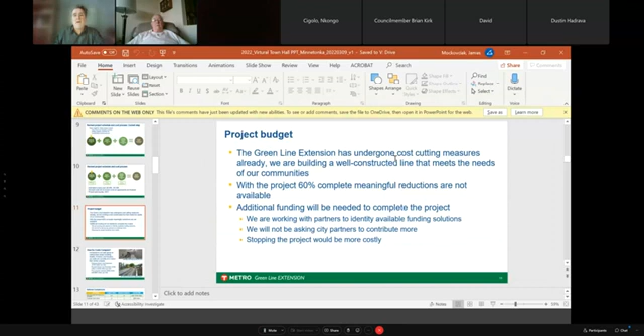Welcome to the Metro Green Line Extension Virtual Town Hall for the city of Minnetonka. This is the first of 5 town hall meetings we're doing—one in every city. That'll include Eden Prairie tomorrow night, then Hopkins, St. Louis Park, and Minneapolis coming up this month.

Some of you may be familiar with this. All right, today's topics: a basic project overview.

As I said, we'll do a project update, a recap of 2021, construction highlights. We've got some photographs of the work we've completed, and a brief description of some of the work we'll be doing in 2022.

We're also going to include a short presentation on the systems overview. The systems contract follows the civil project. We've got about 4 contracts on this project: the rail cars, of which we have about 27 or 28, the civil contract with all the walls, bridges, and everything being built today including stations, and that's followed by the electrification of the light rail system—what we generically call the systems contract. That's going to follow in Eden Prairie and start a little bit in Minnetonka this year, continuing as civil work is completed along the alignment.

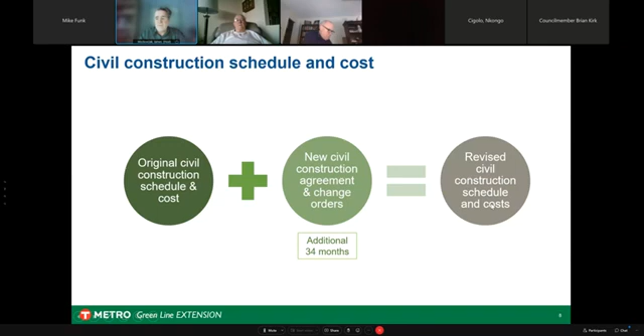And as you know, it's like a domino effect. Once you change one portion of the contract, contracts that follow also are impacted, as those contractors are waiting to do their work, and there are associated costs with overtime and increases in the cost of their lead items. So all of these are consequences of shifts and change, which then lead to the revised civil construction schedule and revised costs that we announced a little bit later last year.

So the revised project schedule and cost process, the current step, taken together, these issues impact, as I mentioned, the other green line extension items like the systems, and it follows that the testing systems, and the ticket booths and the coordination of the stations. Those contracts that follow are all affected - staffing, supplies, overall project schedule.

So now that we have a revised civil schedule and cost, we have to add that to the revised system schedule and cost, and then revise the supporting contracts, testing schedule, and then we get again the revised project opening day and cost that we announced.

So again, the revised civil construction schedule and cost adds an additional 34 months. The revised system schedule and cost, we're in the process of negotiating that with the systems contractor, another joint venture, Aldridge Parsons. And then we have the revised final contract, the revised supporting contracts and testing, and those all still have to be negotiated. Once those are all negotiated, we will have the revised project opening day and cost.

So we've added at this point an estimated project cost of 2.65 billion to 2.75 billion, and of course the final revised costs will be known when all the agreements are finalized. We're projecting the opening day now for 2027.

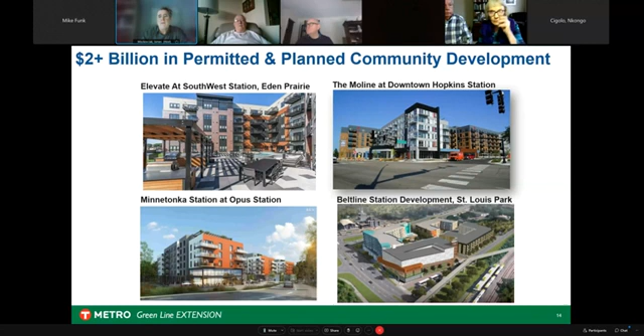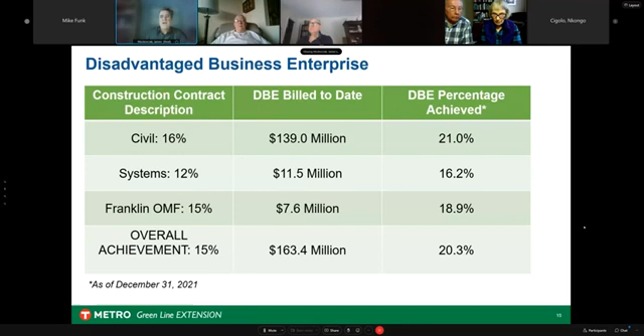We try very hard to meet about a 15% ratio of hiring disadvantaged businesses, what we call DBEs, and you can see in the civil and systems work, the Franklin OMF was the operations and maintenance facility. If you remember, back in 2015, we actually had an operational maintenance facility along this corridor, but as a result of cost-cutting measures, we removed it and expanded the existing OMF on Franklin Avenue associated with the Blue Line. Through all of that work, we've been able to maintain a relatively high percentage, and we're continuing to try very hard to meet our goals. You can see the amount of money that's going out to DBEs as well.

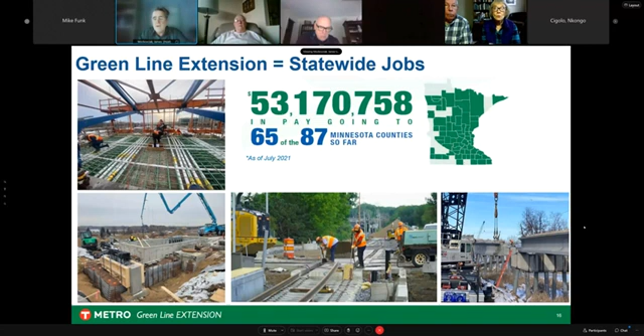And then, of course, it goes beyond just DBEs. You can see that you've got over $53 million in pay going to 65 of the 87 counties in Minnesota so far as of July 2021, so that money is dispersed throughout our general economy. More than 1.8 million hours worked, paychecks for Minnesotans worth more than 53 million from 75% of the counties, and then the disadvantaged business statistics, supporting in general 7,500 construction and construction-related jobs and a large payroll.

All right, getting through this, before I go any further, does anybody have any questions about some of the material already presented?

Right, if not, then we will go on to the 2021 recap.

I have a quick question. Sure, what do you got?

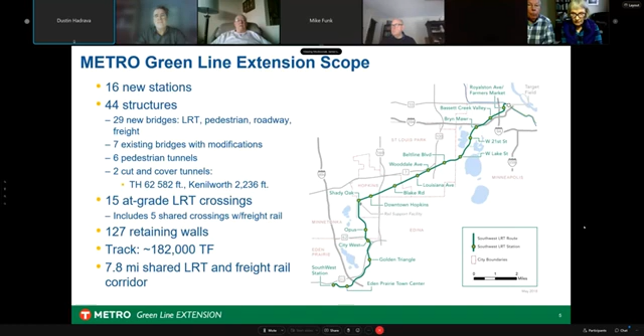Oh, I think you're thinking of this one. Yeah, I was wondering, with it opening up in 2027 now, and I think it was anticipated for like 2023.

Yep. Do you think those in between areas, because I guess I'm over in the Shady Oak, downtown Hopkins, Opus location area, do you think there's potential where you guys would just not have it have a complete connection, and maybe try to get neighborhoods and people in those residential areas putting some sort of monetary value, like a partial system connection or anything?

Right, so if I hear you correctly, it's a very good question. I think you're asking, we've heard it often. The long lead item here would be the tunnel in Kenilworth, right? As you can see, a lot of the civil infrastructure along the corridor is already completed or will be completed this year. Systems will continue to work in Eden Prairie and Minnetonka, so you go all the way to Hopkins. So you're asking, can we just run the train in between there? Is that what you're asking?

Yeah, pretty much. We've looked at that, and unfortunately it's just too complex given the logistics, trying to run that operation properly as an extension of the Green Line after we run the testing. From what I've understood, it's just not possible to do that. But it's a very good idea. When it comes down to actually operationally making that happen, it's just not feasible with all the variables involved.

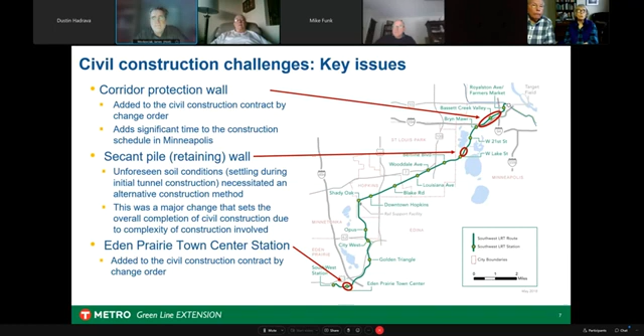All right, then. I have a question regarding the budget increase. I think you mentioned additional sources of funding or business partners. What are some examples of that?

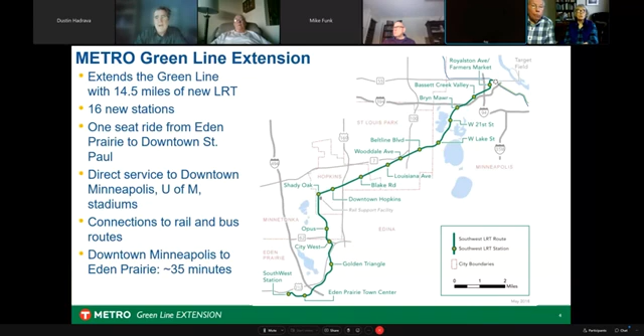Well, in terms of our funding partners, I think our primary funding partner is probably Hennepin County. I don't know for a fact, but potential funding sources could be federal sources, could be state sources, but primarily our partnership up to this point has been with Hennepin County. I don't think those sources have been identified at this point, but again, they're our partners. They're deeply committed to seeing this through, and they will work with us in order to identify those partnerships for additional funding.

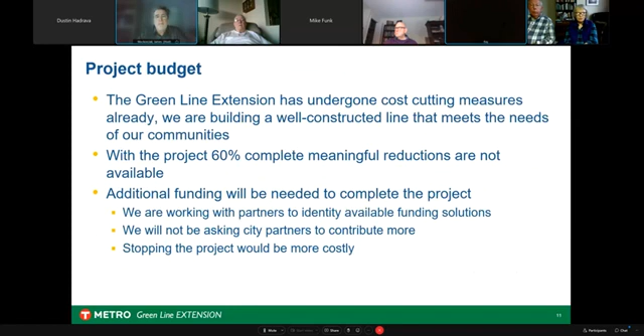Okay, and then I had one other additional question. You had a slide as far as cost comparison between this project and similar projects. Was any additional cost benefit analysis done within the scope of this project itself, meaning cost per route option 1, route option 2?

Yeah, that's an excellent question. People served on each option.

I don't think the way these projects run is... these things are heavy lift, right? This project's been in the works for over 20 years. I think the first reference, I've been with the project for 7 years, and when I came on board, the first reference I found was 1988, and at that point it was just a dream. It was a Hennepin County document, and I think at that point they estimated it would be like $500,000. So we missed that boat. That would have been a deal. But these things take a long time.

So they start with the county, right? And then the county basically goes through the process of defining what we call the LPA, the locally preferred alternative. This is a process. I know Julie could speak to this, I'm sure she was involved in Minnetonka, where we work with our city partners in terms of where the alignment is going through. We have lengthy discussions and input about where the best place for that alignment is. Down in Eden Prairie, I think at some point there were, I want to say, between 8 and 12 alternatives.

So this process is sort of done long before you begin the design phase. You sort of know where that locally preferred alternative is going to be, and there's a collaborative process that goes on with our partners, with our city partners, I don't know if the FTA is involved at that point, and it's quite extensive and involved, and a decision is made, all things considered, of where that is. So at this point, that decision's already been made, and changing the alternative is not on the table.

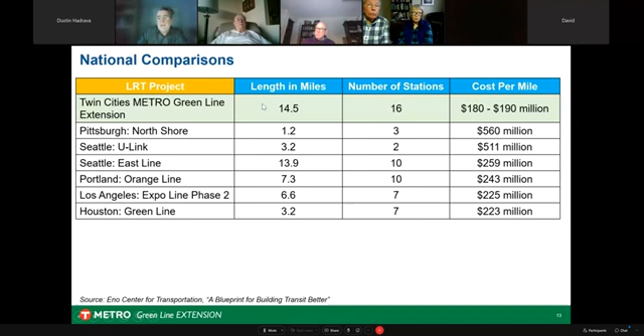Okay, can we go on? All right, no more questions. We got plenty of time, a whole hour here, another half an hour. So there's no rush, you can stay late if somebody has additional questions.

All right, I'll go forward here to our project. I'm going backwards, okay.

Here we go, here's the recap. As I mentioned earlier, there are several contracts and several phases here. A good portion of what was done in the first year had nothing much to do necessarily with the LRT operation. There were all these utilities, over 1,300 or so private and public utilities that had to be resolved, moving lines and so forth throughout the corridor, and putting in new utilities. Oftentimes in conversations with the city, the city has plans too, and if they had plans to make improvements in a certain area, we were able to work together to do those improvements while we were already there, rather than double up and come back to do it. So the utilities was a major enterprise, it took a long time. And then of course the site prep, and then what you see happening now, that's where we're at, that 60%.

About 60% completion now for structures, track, and stations. You can see all of that. Then of course you'll start to see, especially down in Eden Prairie, this fourth element, the systems, the electrification, and all the elements going into that. And then finally, as I said, we've got that last contract, the testing, safety comms, the operator training, and so on and so forth.

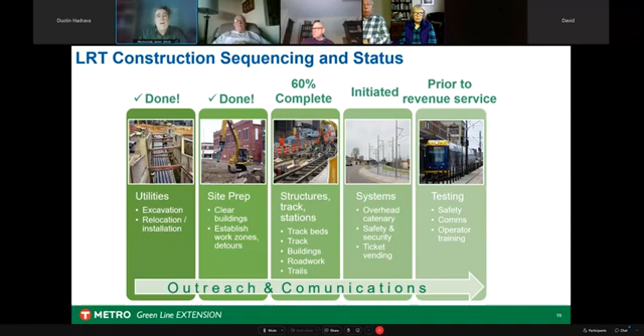How does this thing keep doing this? Anybody have any suggestions here? When I stop it a long time, it just kind of stalls on me here. All right.

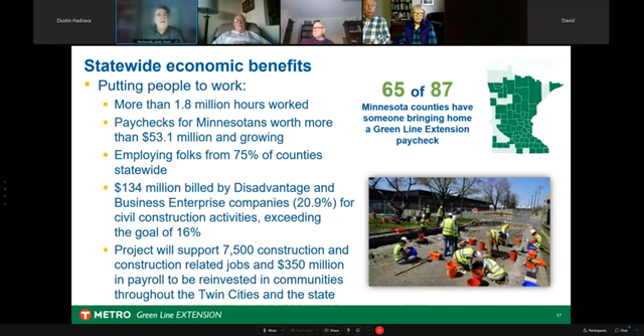As you can see, 25 bridges are underway out of 29, 8 tunnels out of 8, 114 retaining walls we've got underway here. Good percentage of those, if you drive through Opus, you'll see them there. In Minnetonka, we've got 95%. There's the number on the private utilities, the number on the public utilities, the number of building demolitions, the number of LRV vehicles Siemens has created for us that have already been delivered, and the expansion of that operation and maintenance facility existing on Franklin Street.

I'm sorry, I don't know why I'm having what's going on with my computer here, but I will persevere.

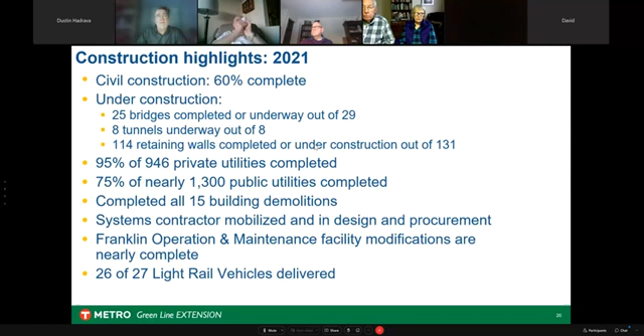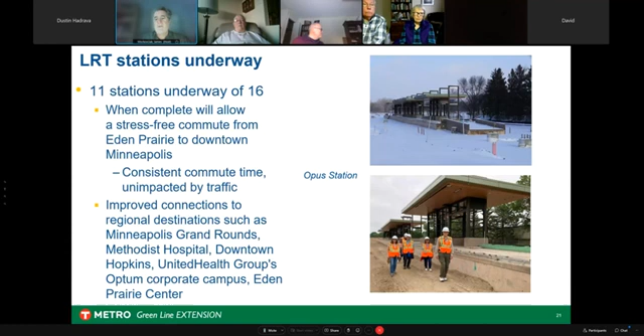In addition, we have 11 of the 16 stations underway. You can see one of our tours there on the bottom right. The construction highlights, again, 60% done.

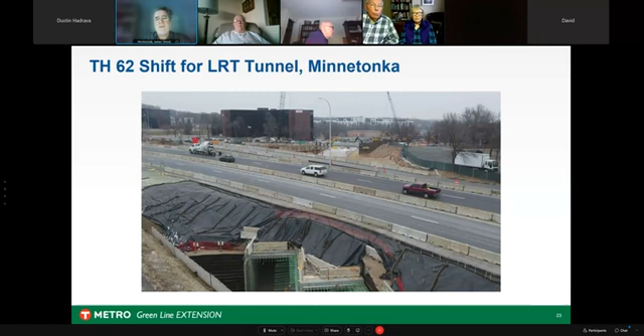62 shift - as I just mentioned, when we were building the tunnel, we built it half at a time. So we had to reroute a portion of Highway 62, and then we put it all back together again. Here's some other nice photos of the northern part of the tunnel house as it enters Opus.

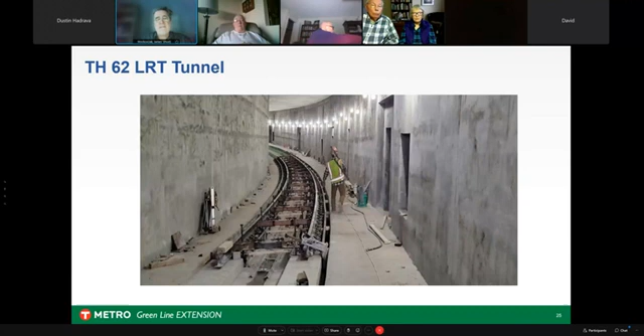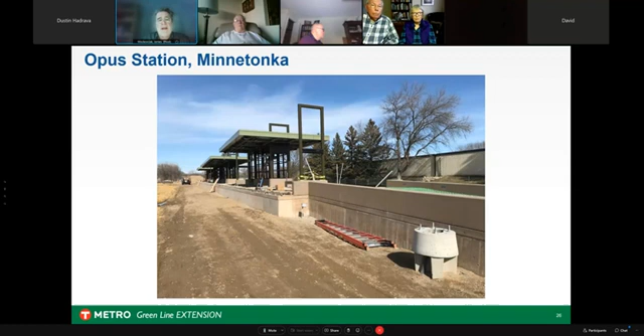That's inside the tunnel house where the tracks are being laid. And Opus Station, the one station in Minnetonka, right alongside Opus in Minneapolis, Smetana and East Bren Road. You can see some of the retaining walls here. To the left, that's the Dominium, the new apartment building, just off of East Bren Road.

You can see it's like a castle-like moat down below there. It's a very large retaining wall that dovetails with a bridge painted on the left-hand side, which the city constructed last year. And then you see the scale of the retaining wall here along Opus Hill, and that's Claremont on the left, if you know that area. We're walking south there.

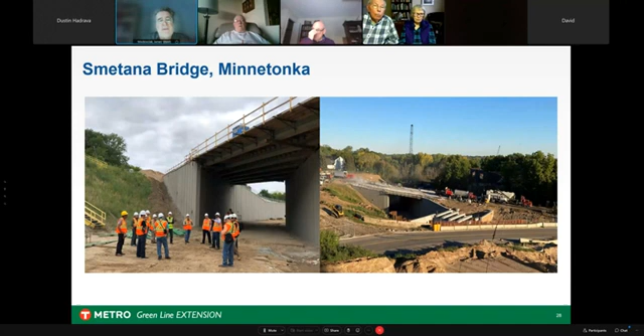And then we've got Smetana Bridge, as you know, on the right-hand side. You can see we've completed the bridge at that point, and they're doing the tar seal and putting the road back together that was opened later last year. But before it was, we had taken a tour down there, and people were able to walk down and see some of the construction, see the scale of some of the work we were completing.

And then, of course, at the end of the Minnetonka corridor, we have the Minnetonka-Hopkins Bridge. It's the longest bridge in the corridor, over 3,000 feet. You can see the scale of some of those beams. If anybody lives nearby, you'd be glad to know that all that noise from driving pile has been completed in that area.

We laid those heavy beams. We're finishing up the superstructure this year, so work will continue. You can see in the distance here, that bridge just continues. It goes over the railroad tracks near Shady Oak Road and all the way lands by K-Tel Drive.

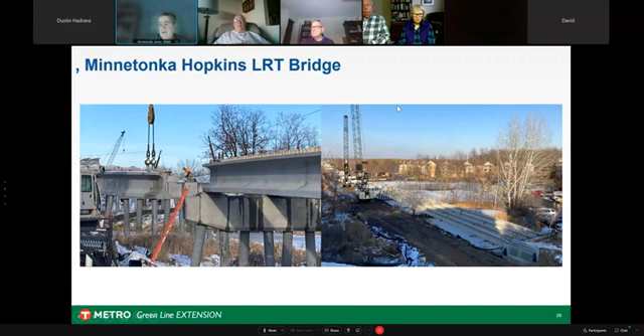There's just a photo looking from Greenfield Apartments. Smetana Drive would be on your left. And this is looking west, southwest at those beams and the piles after it was completed.

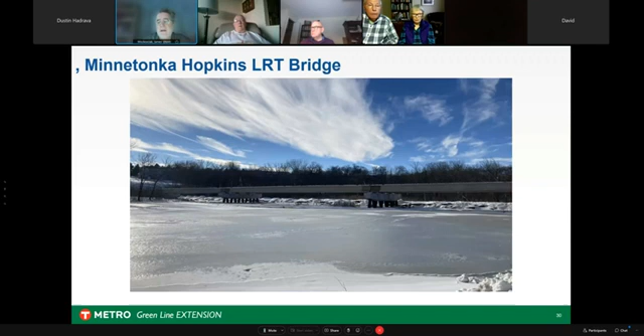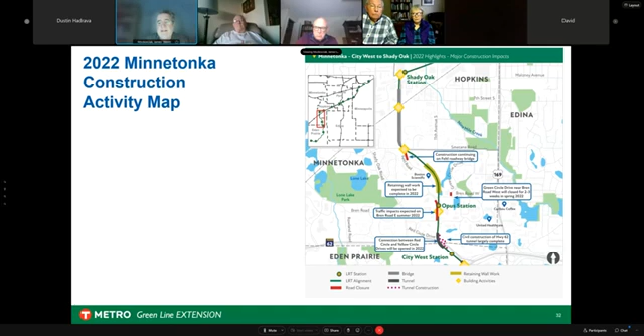In bridges and tunnels, we've got the track work that we're working on now in the LRT tunnel. As I mentioned, the Minnetonka-Hopkins Bridge, Feltl Road - there's a bridge we're completing there, and at the end of this season, we anticipate Feltl Road will be restored. So that connection, Feltl Road to Smetana Road, for people who drive into the park from the north or out in that area, will be complete.

Traffic impacts - we have a few currently underway, as we're working sort of right south of Minneapolis Mart, if you know the area, red and yellow circle drives. We've got a little short-term closure to reconstruct Green Circle, and then we'll continue track work. You can see some of the photos there - again, the tunnel house, and that's a pedestrian tunnel there. We're going to have a really beautiful beautification of some of the trail systems there, as that trail system will all be restored in Opus.

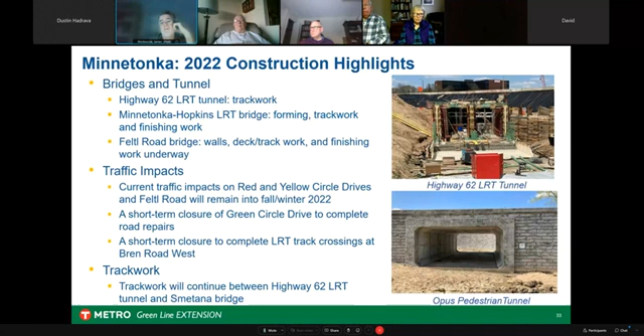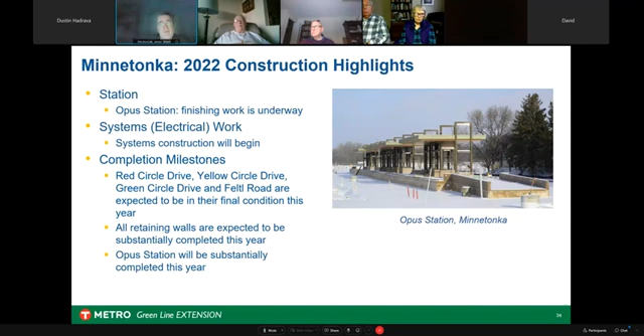Some of the highlights again: the Opus Station, we'll continue to finish that, and systems work will begin some preliminary work in Minnetonka this year. Some of the milestones this year are we want to see red circle, yellow circle, green circle, Feltl Road, like Smetana Drive last year, in their final condition. We've got a lot of work to do, finishing all the retaining walls, and Opus Station will be substantially completed as well, and they'll continue on the track work.

Any questions? I have one. This audit that we hear about going on, is that going to affect this summer's construction season?

No, I don't believe it. There's no expectation that that'll happen. Do we have any idea how long that audit's going to take? I don't know, I don't think at this point we know. I think that's still working its way through the legislature, and once that process has been completed, we'll probably have a better idea.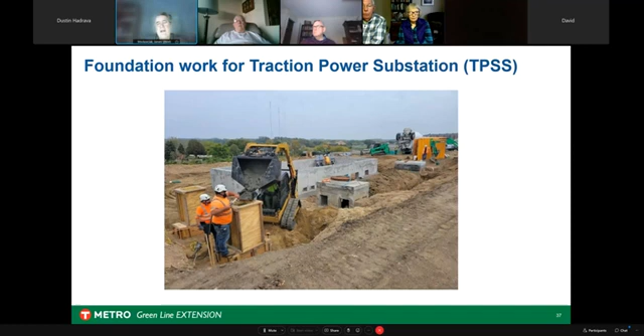This is the first one they've been working on in Eden Prairie. It's the foundation, and on top of that you will see something like this, and that'll be the TPSS house. It looks basically like a container, and inside you've got some pretty sophisticated electric equipment.

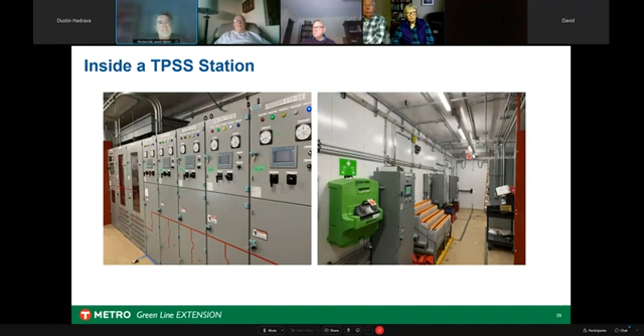Finally, just communications and outreach. So far in the 3.5 years since 2018, roughly going on 4 years now of construction, we have about 16,600 subscribers to our weekly construction updates. In the wintertime we slow that down to bi-weekly because there's not as much work going on, but I'm sure we're going to go back to the weekly schedule just to keep people updated. It's a great resource - you can go on our webpage and subscribe, put an email address in, and then you will get the most recent update every Friday afternoon, generally late Friday afternoon.

That'll also include any detours, right? Any maps that might be available in order to help our residents plan their transportation and plan their week.

We also have something called the Construction Information Work Group. It's kind of the committees we have after the design phase. During design we have a business advisory committee and a community advisory committee, and they give us input during the design phase, and after that we've kind of phased those out. We meet occasionally with the business advisory committee, but we have what's called the Construction Information Work Group, or CIWG. These are city-nominated folks in the community, business owners, just community members who participate in meetings that we hold once a month, once every two months, depending generally on need and the level of construction, and they give us input - how are we doing, how can we do things better. It's a fairly useful committee group. We've had four of those.

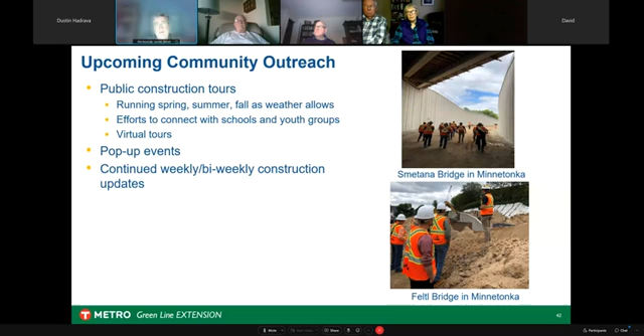And that is the end of my presentation. So thank you for bearing with me as I tried to get through that.

All right, if anybody's not all sleepy, I appreciate again your attentiveness. I'd just like to know, does anybody have any questions or comments before we move on?

James, Brian Kirk here. Can you hear me? Yeah. Hey, a question about the disrupted bike trails - they've been rerouted now for quite a while. When can we expect some of those to reopen in Minnetonka?

I'm going to toss that one to my colleague who deals with that quite a bit in Hopkins and along Minneapolis. But in terms of Minnetonka, we've had that discussion recently, and here's some of the difficulty in answering that question. Presumably we'd like to complete most of the civil construction, put that all back together and create the opportunity. That would include the trails that we have disrupted, reconnecting them - that's part of what we need to reconstitute. In theory, we were attempting to put that all back together by the end of this year.